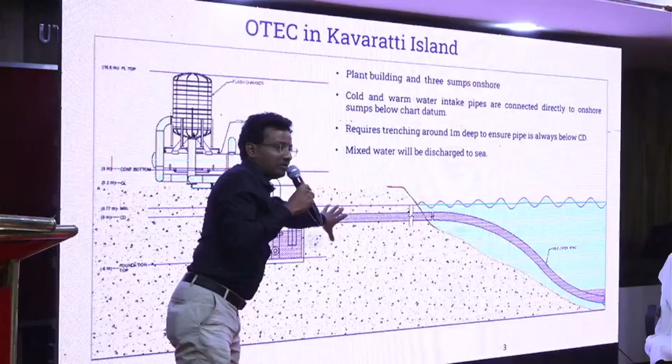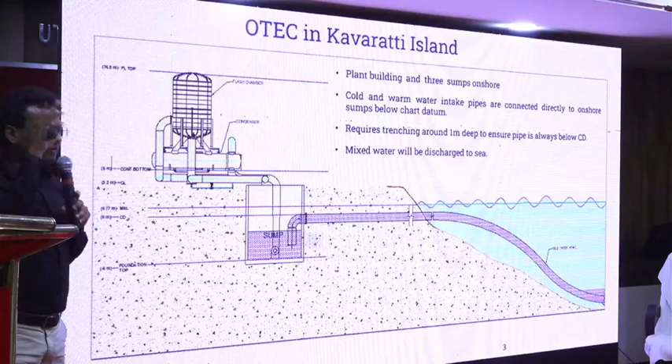0.5 degrees at the deep sea end. Yeah, why this cold water? And exactly because we have a senior colleague who is working on process, so he's a better person to explain to you. I'm from the structural background. So how much water do you generate? How much water do you produce?

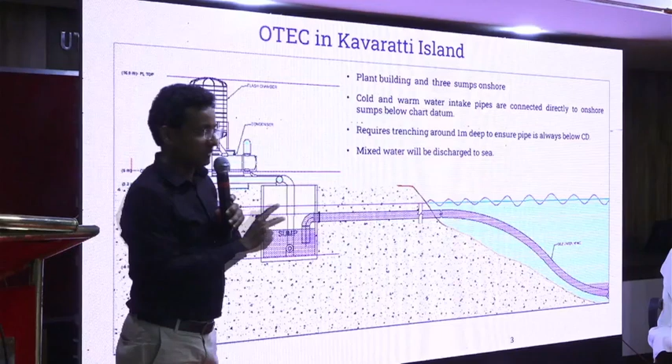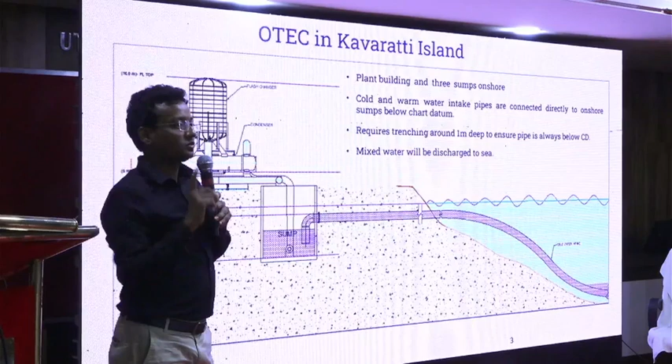So in Lakshadweep, depending on the population of the islands, the maximum population is 11,000 per island. That's in the capital city, Kavaratti Island. So for that, we have 1 lakh liters per day as the capacity, and that is self-powered. So it is running as long as the temperature difference is available in the sea. Only for starting the plant will we be using the grid connection. Once the equipment starts and the pump starts running, it will be totally free of the grid.

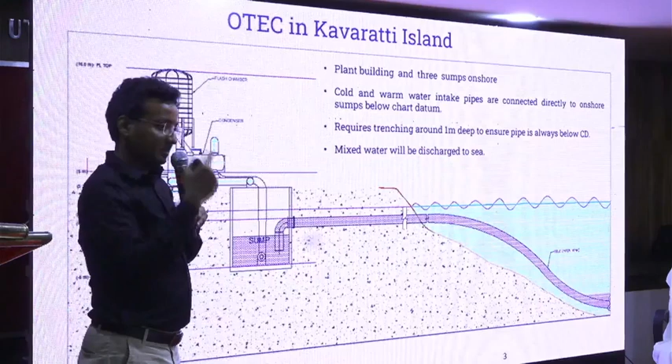And in case, at some point in time, you want to generate more water out of the same plant, then the turbine can be bypassed for some time. The plant can be put on the grid. Then you can get 1.5 lakh liters per day from the same plant.

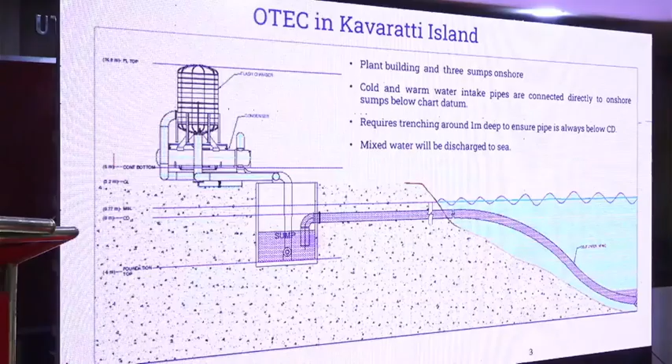The last paper of this session is cost of energy in a vessel, that is assessing likely applications in marine transport where shift to electric will succeed without other intervention. This will be presented by Mr. Sandith Thandasherry. Sandith Thandasherry is the founder CEO of NavAlt Solar and Electric Boats, the firm that built India's first solar ferry and recently the largest and fastest solar boat as well. Now in the process of completing landmark projects in defense, fishing and ROROs, all solar electric.

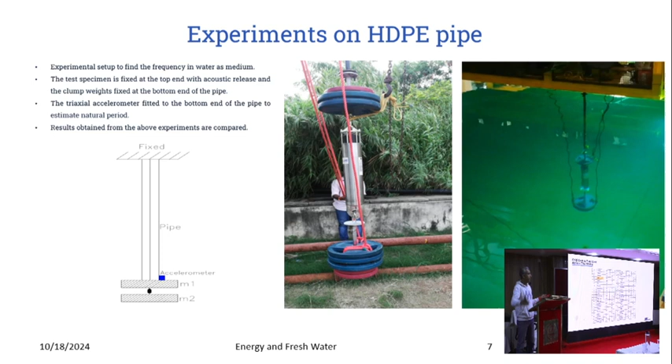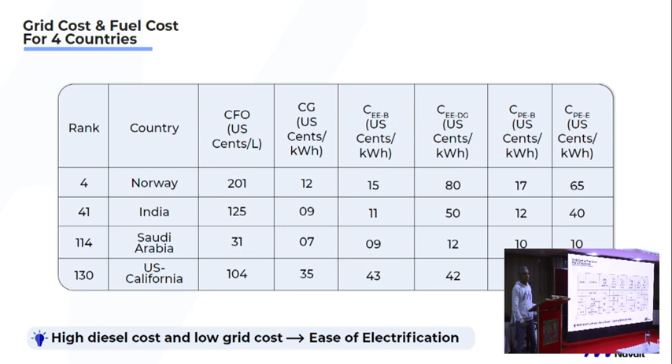So it is not just OPEX, and I showed the OPEX part. When you do electric propulsion, the regulations on the propulsion side are much more stringent. So the capex also is higher when you do propulsion. So almost always, for any vessel, whatever program the government runs, do auxiliary first, then go to propulsion. And of course, you should ideally do both.

And then fuel cell. There is a lot of talk of fuel cell and the source of hydrogen. So today there is no price realization in any country. If you go to Europe, if you have a Mirai car, you can go to a pump and put it in, I think it's 10 euro. Last time, at least in Germany, I checked that number, it's 10 euro. It's still on a very high scale.

I just put three numbers: 5 USD per kg, which is a very optimistic scenario today. It doesn't exist. Technically it can, because theoretically, for 1 kg of hydrogen by electrolysis, if you can get the solar cost at 2 rupees, you technically need about 40-45 kilowatt hours of energy to do the electrolysis, which means about $1 is the cost of electrolysis, then there is compression, etc. So you can get here today, maybe 3 in the near term and 2 in the very long term.

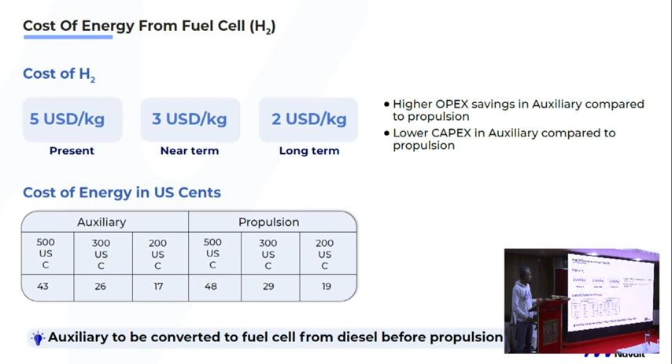Hydrogen has an added issue that even the capex is ridiculously high, at least today. But in certain applications, battery will not work and thereby you need hydrogen. So that's where we should take care. In the previous slide, in California hydrogen works whereas battery doesn't work very well. So that's more to do with the difference in fuel. So again, hydrogen has the same property: auxiliary first, then propulsion, because of the same savings.

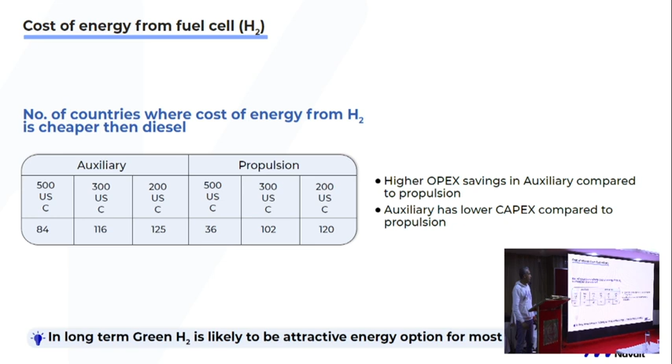If you look at all the countries, about 84 countries can switch to hydrogen at today's price compared to diesel, not with battery. Whereas as it reduces, the number of countries increases to almost 125. So in the long term, hydrogen works very well for most countries in those applications, not in every application. In practice, in reality, all systems work in a combination. So I gave each individually.

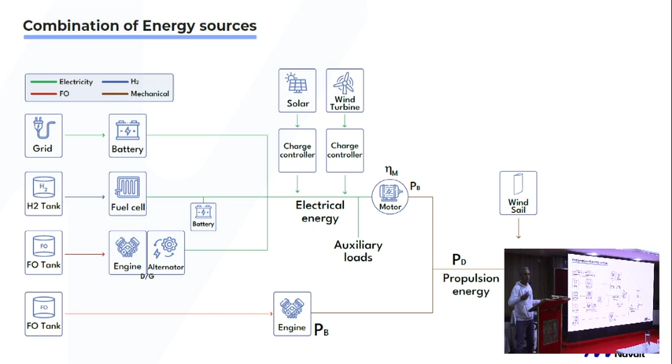Now when you do combination, there is a grid battery, there is fuel cell, there is auxiliary engine, all generating electricity. Then there is solar, there is wind turbine. There is engine giving mechanical energy and motor giving mechanical energy, plus wind to thrust. So in reality, you can have all these. The way to compute in combination is to look at the contribution of energy, like any weighted average you do. You do the contribution by ratio to get these numbers.

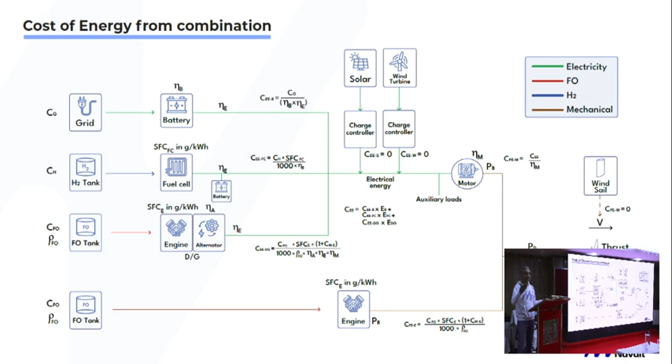To give it a number in practice, I will give an example of a diesel ferry, electric ferry, and a solar ferry. These are actual boats. So the example is the Aditya solar ferry. 67% of its energy is from sun. This is data for now 7 years. So 67% is from sun, 33 is from grid, which means the cost of mechanical energy, what you get from the motor, is about 4 US cents, which is about 3.5 rupees.

Whereas in a pure electric ferry with a grid cost in India, these are all India numbers, this is about 12 cents. And a very efficient diesel is 40 cents. So 4, 12, 40. So it's a 1/3 reduction when we shift from diesel to electric in India, and another 1/3 if you shift to solar, provided the solar contribution is 67%. This works in slower speed ferries, not in fast ferries, where the contribution of solar cannot be 67. That's also an important caveat.

So here I have ignored the fact that in India, traditional diesel ferries are highly inefficient, which Dr. Opisha mentioned about how CFD optimization helps. A traditional diesel ferry has another problem, that it's built of steel or aluminum, so you may have another 3 times saving. So typically, when we put Aditya numbers, it is 1 by 35. This shows 10 times. The 3.5 additional is because traditional has about 3 times inefficiency. That's to do with the choice of material.

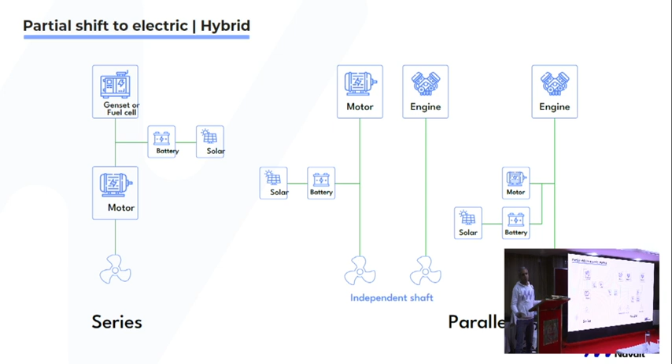In a series hybrid you have an additional conversion of mechanical energy to electric, and that is what drives the cost. So almost always parallel hybrid will have a lower operating expense. It will also have a lower capital expenditure, because in series hybrid the motor is as big as your propulsion need, whereas in parallel hybrid you can make it smaller to the need in the zero emission mode, like Sri Opisha mentioned in the tug case, where you can have a motor smaller than the total requirement. So always choose parallel hybrid when it works compared to series hybrid. There are certain applications where this will not work, then of course you have a different choice.

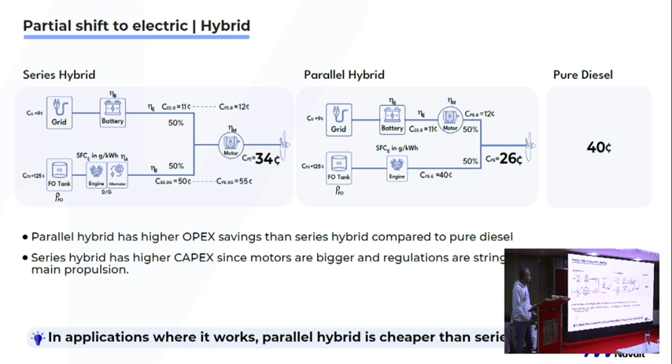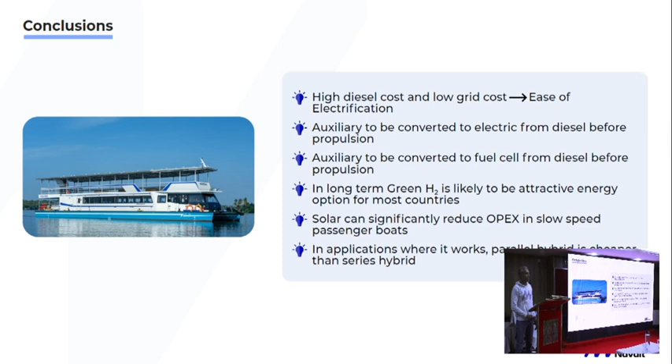So this is the other insight, and I just want to summarize these 6 insights you get just by looking at the cost of energy: the spread between diesel and grid will make the electrification. Auxiliary first, both in shift to electric or shift to fuel cell. In the long term, green hydrogen will work in many applications. Solar can significantly lower OPEX, especially in applications where its contribution is higher, which is more like slow speed, and in applications where it works, parallel is cheaper. So these are some of the insights you can get. The more complex is to go to capex and total cost of ownership, and that is a different session, different time.

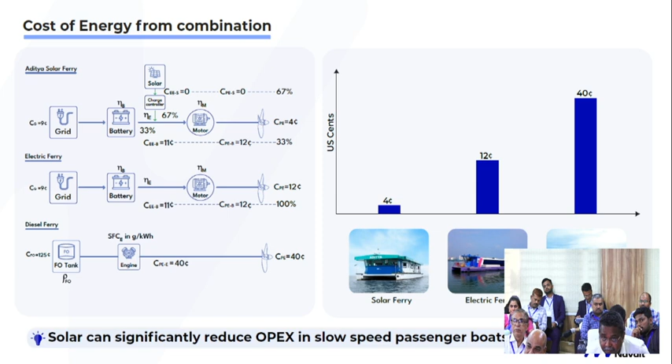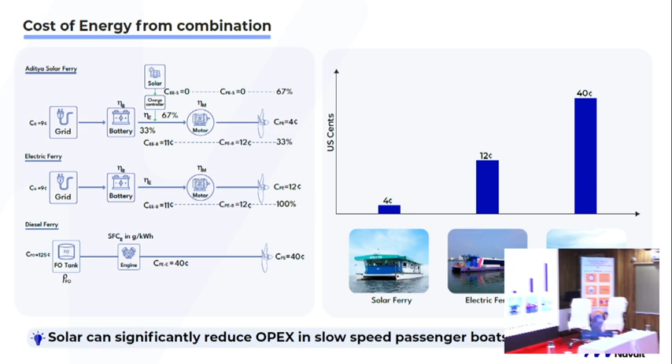Between solar and electric, it's almost the same because both have an electric system. Solar is in addition, which typically has very low maintenance. For a solar panel, you don't do any maintenance per se, so there is no incremental maintenance by putting solar on the vessel. But it's a small number for both solar and electric, the maintenance cost itself at the OPEX level.

Coming to the electrical side, battery replacement - which is why I said the next level is looking at the life cycle cost, which has the energy cost, all the other maintenance, battery replacement cost, capex, everything. That's a much deeper analysis, that's the next step which should be done. I totally agree with you.

Yes. In this paper you have named it as a ferry, the Aditya Solar Ferry - so that is designed for what speed? 6 knots, 6 knots, 6 knots.

Yeah, only at that 6 knots, which I want to very clearly say to Opisha sir - at 6 knots is what makes the 67% work. I gave the example at 6, and I clearly say in a faster ferry, at 8 knots or 10 knots, that 67% is difficult to achieve. You cannot achieve it because the sun's energy is fixed by the area, so the percentage will keep dropping as the energy need increases.

The operation profile of the vessel is also important, right? The operation profile of the vessel is also important - that is what drives that 67%.

Like in Aditya's case, it runs from 7 to 7, about 70 kilometers in a day - talking about the hours. That is also important, that will come in here, 67%, nowhere else - it will drive that 67%.